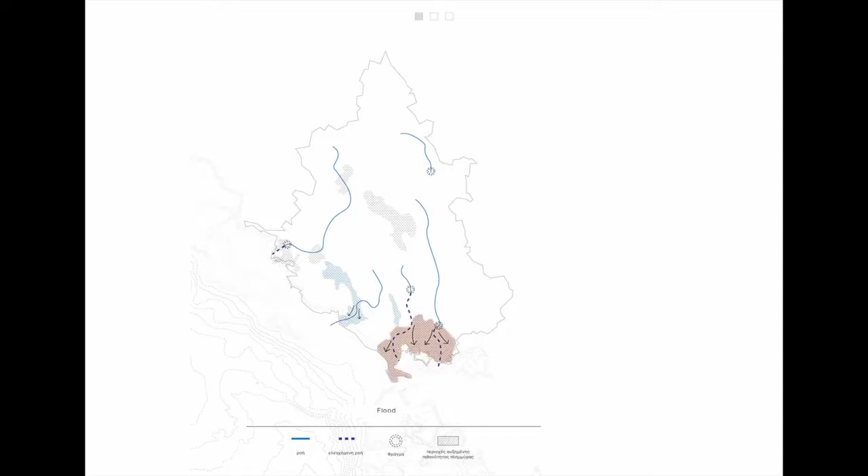In order to analyze the flood problems, the research is focusing on mapping the changes of the three landscapes of the mouth over the years, starting with the artificial lake and the two dams that have completely changed the climate and ecosystem of the area.

Secondly, the riparian zone of Arta, an abandoned and occasionally flooded area, and finally, the productive meadow, where severe floods occur because of the incapability of the two dams.

The second part of the project is a strategy for managing the three parts of the river's mouth. The strategy treats the river as a natural mechanism that adapts to the changes of water flow and creates different sustainable waterscapes in its path to the bay.

The strategy is composed of three different phases which concern the three parts of the natural mechanism. The first phase includes the controlled change of river flow through different dam management for the formation of new meadow lakes. The second phase is the generation of Arta's riverfront, including three riparian interventions.

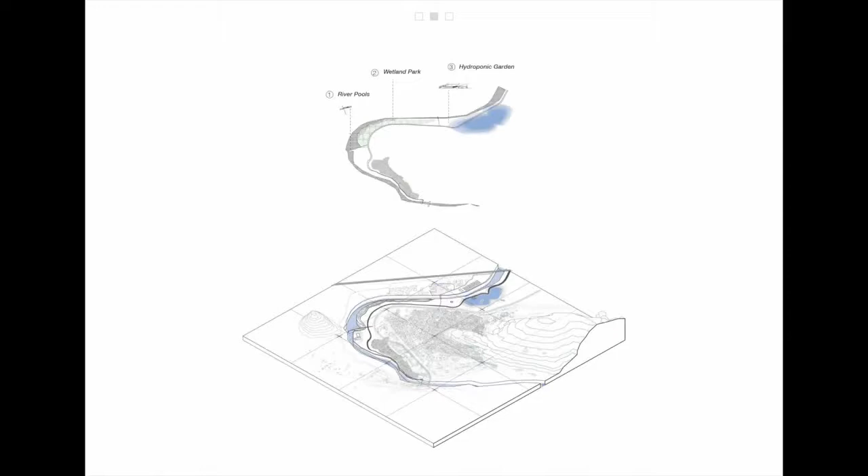Finally, the third part of the strategy is about the phasing flooding of the meadow for water cultivation, which will cause the formation of different fluvial wetlands for preventing the flood of the villages, transforming the meadow into an archipelago of hydroponic islands.

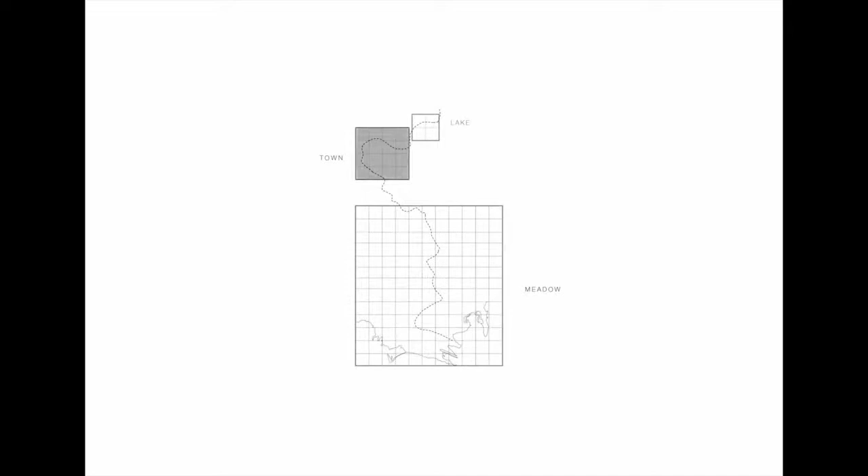The third and last part is focusing on the urban landscape of the mouth, the town of Arta. The design of three interventions at the riverfront of the city aims to gradually strengthen the habitat relationship with the river. Therefore, it is proposed a design of two river pools, which constitutes a landscape of recreation.

This introduces to the city a new habit of seasonal river bathing.

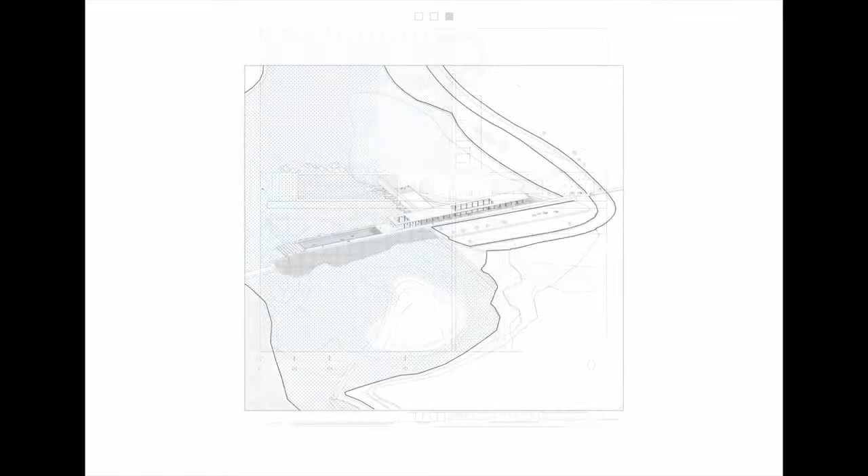A wetland park which manages the river's rapidity in the winter months while providing residents with a park area.

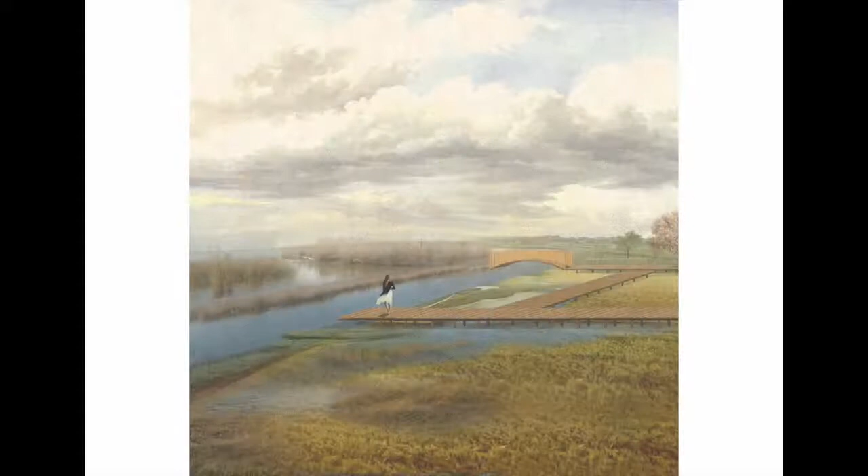And finally, a hydroponic garden for experimental water cultivation that will be accessible by all citizens in order to become familiar with the process of hydroponic agriculture.

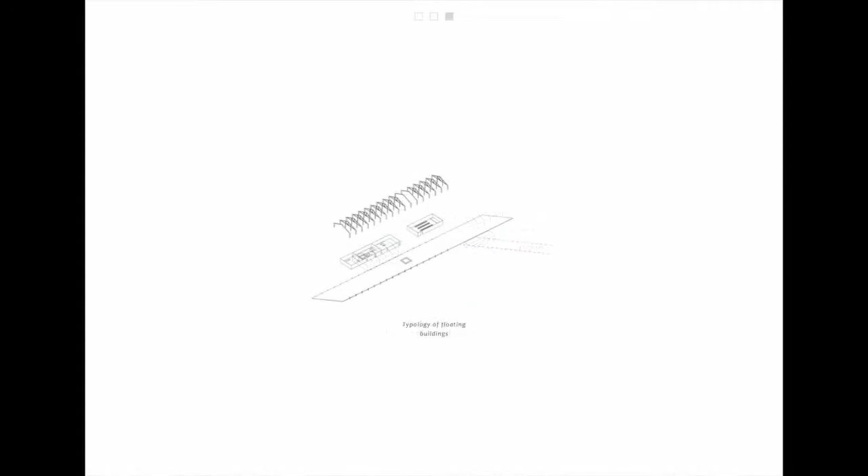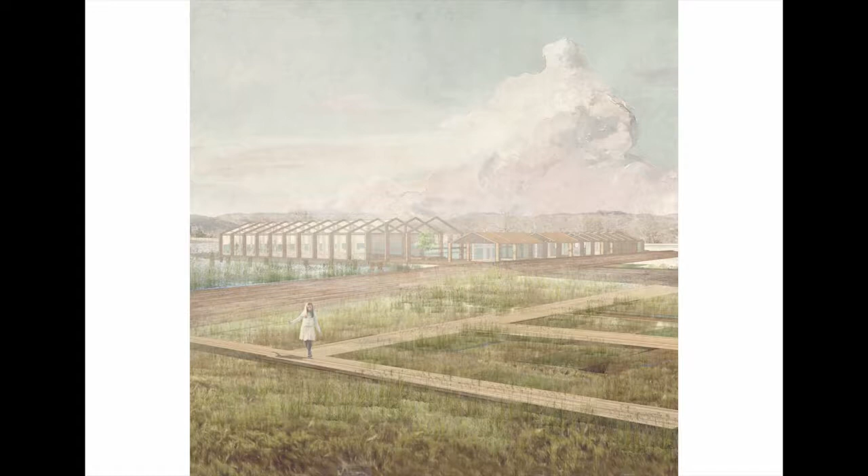The hydroponics will be planted on special platforms in the water of the lake as well as educational buildings and hydroponic greenhouses. Therefore, the unfavorable condition of flooding can turn the flood risk into a significant pole of development for the area, a sustainable process that is going to preserve a riverside archipelago.